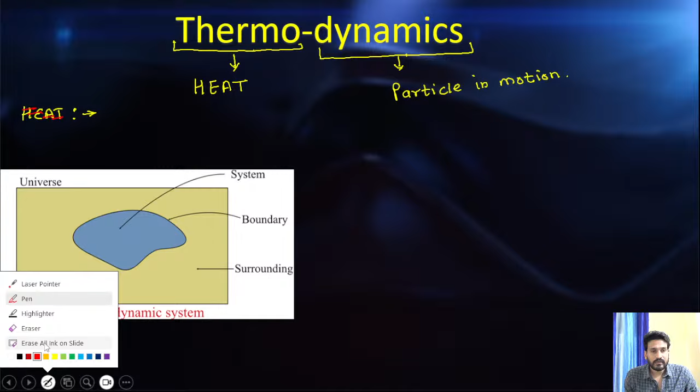So basically I can give a statement, or you can say a definition of thermodynamics: it is the branch of science which deals with heat and its relation to energy, work, and the changes occurring in a system due to motion of particles.

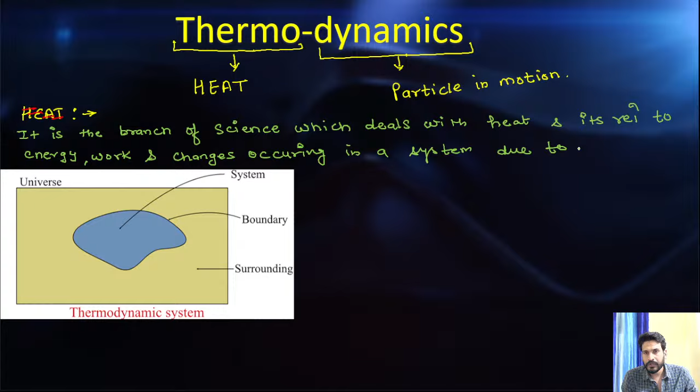Right? So what is the meaning of thermodynamics? It is the branch of science which deals with heat and its relations to energy, work, and changes occurring in the system due to the motion of the particles. Here is a word that is called the system. So first we have to understand what is the meaning of the system. I hope that this is clear to you, right?

So before understanding the system, I can give you another definition of thermodynamics, which is similar to the above. I can say that thermodynamics may also be termed as energy conversion, as in this heat is converted into work or vice versa, right?

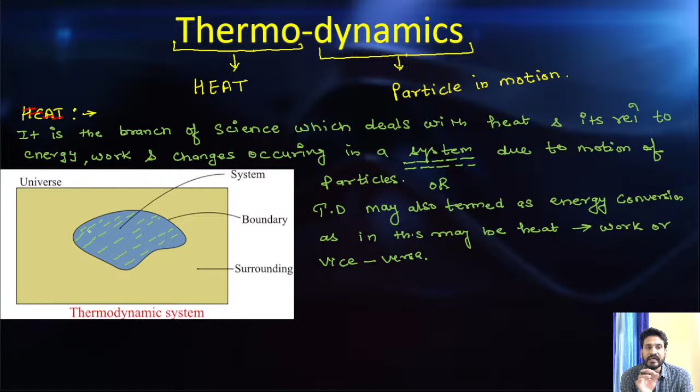Let's suppose in this picture this is the area which is under our observation. What is the meaning of under observation? Under observation means that we are interested to see the energy interactions for this particular area, right? Whatever is happening other than this is not our concern. Our concern is only to study the energy interactions and changes in this particular part due to the motion of the particles. That is called my system, guys.

Other than this, whatever is surrounding, like this area, is called surrounding, right? And an imaginary boundary line is there which separates the system from the surrounding. So this line, this boundary, is nothing but an imaginary line. These are my system boundaries. I hope that this is clear to you.

So this is my system and this is my surrounding, and these are the system boundaries, right? So there is no physical significance of this boundary. This is basically an imaginary separation. I hope that this is clear to you. So only this part is under our observation. Okay, is it clear to you?

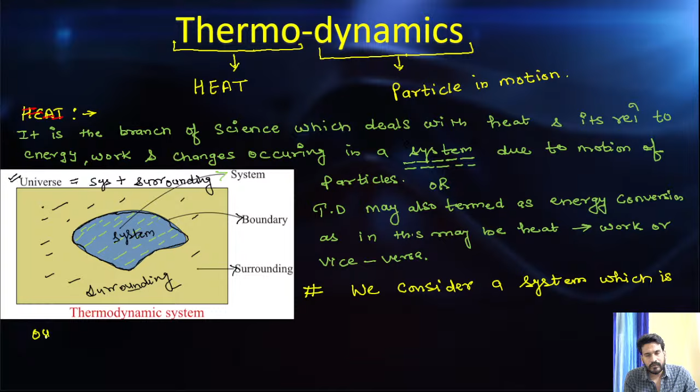So I can make a statement from this concept: we consider a system which is under our observation, right, having boundaries and occupying some space, right? Is it clear to you?

Okay, whatever interaction there is between heat and work, that is basically the interaction between the surrounding and the system. Is it clear to you? Whatever interaction we see between the energies, that is between the system and the surrounding. Is it clear to you?

Right? This is called my thermodynamic system, right? So everything around the system is surrounding. So what is my universe? Universe means system plus surrounding. System plus surrounding is my universe. Okay. Is it clear to you guys? Mohammed, is this clear to you?

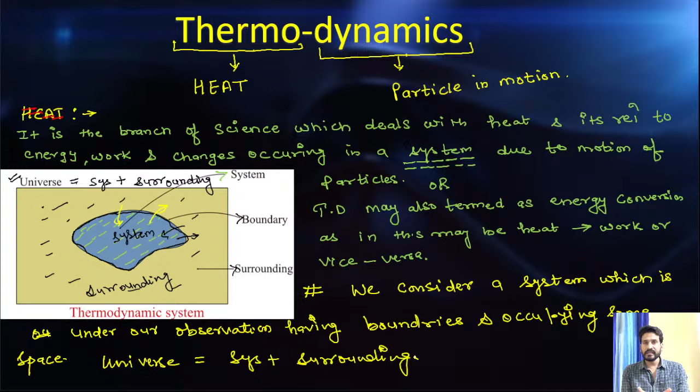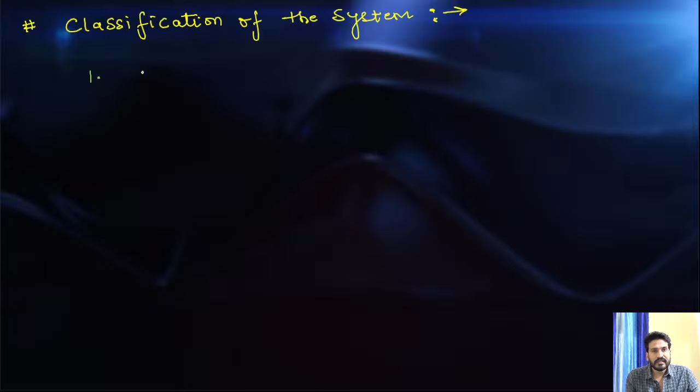Now we have to study the different types of the system. So you can make a heading, classification of the system. What are the different types of the system? So guys, roughly there are three types of the system. One is the closed system.

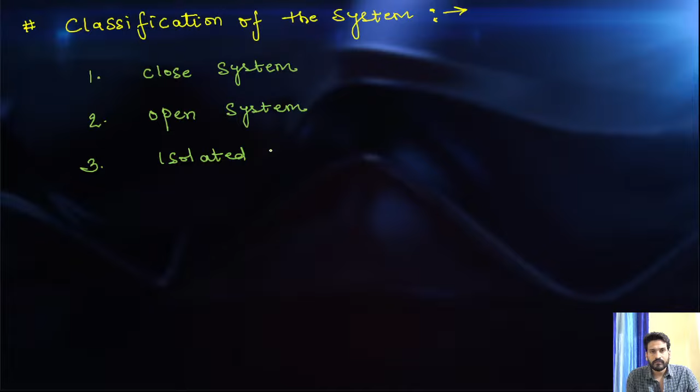Second is my open system. And third is my isolated system. There are three types of the system: closed system, open system, and the isolated system. So what is the meaning of closed system, open system, and isolated system? Let's see this, guys.

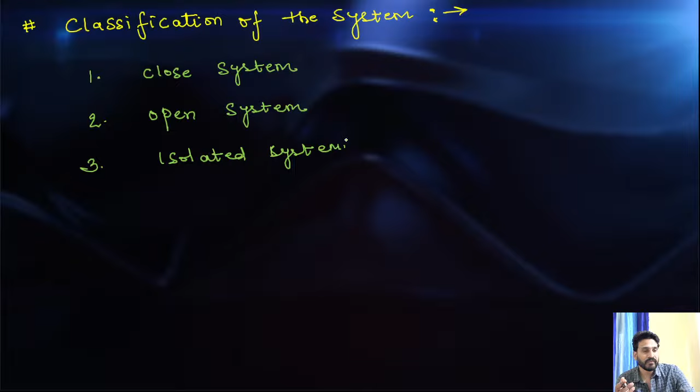If a question statement is like, okay, we have an open system like this, we have a closed system like this, so we should know what the meaning of closed system and open system is. For open system, there are different concepts. For the closed system, there are different concepts. For isolated system, there are different concepts. Okay? Let's discuss, guys.

First of all, closed system. Please put a heading, closed system. To understand the closed system, let's make a diagram so it is easy for us to understand the concept. Closed system is also known as the non-flow system.

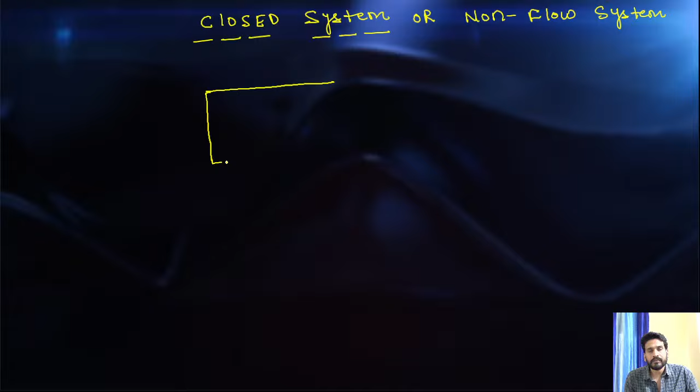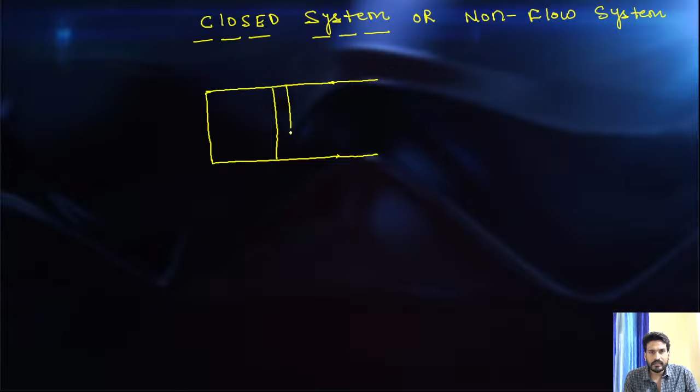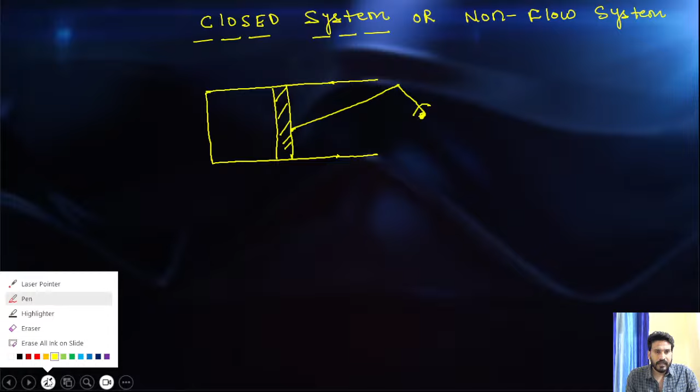Let's suppose, guys, we have a cylinder piston arrangement. It is something like that. Let's suppose that initially the position of the piston is this. This is your piston. This is a crankshaft which is attached to the piston. And these are the gas molecules. Just try to understand it.

Now, first of all, we have to decide what the system is, because we are not here to study the universe, guys. We are here to study a particular system. So for that purpose, we select some specific boundary. And after that, we see the interaction of the system with the surrounding. So I want to see the behavior of the gases when I heat this gas.

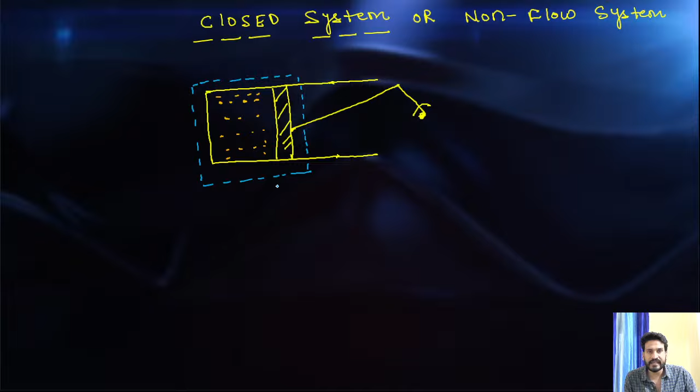So let's suppose this is my area under observation: this piston, this gas, and like that. This is my system boundary, guys. This dashed line is my system boundary. I'm giving heat to this system, right?

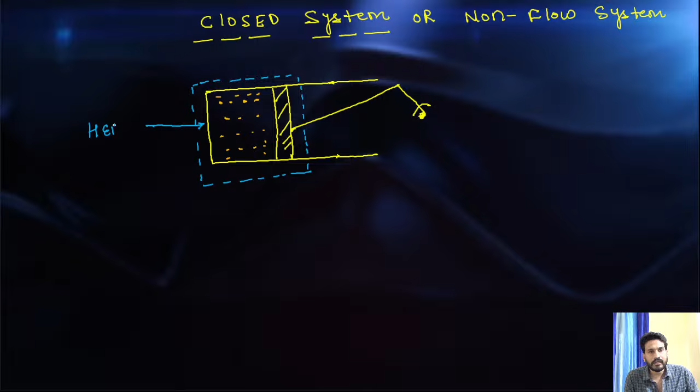So as you can see, if we are heating this cylinder gas system, this gas is going to expand, right? If this gas expands, then your piston moves in this direction. Is it clear to you? When we supply heat to the gas, it is going to expand. The intermolecular distance between the molecules is going to increase, right?

And these molecules apply force on the piston, and the piston is going forward. Let's suppose this is the initial position. The final position of the piston is like this, right? And the gas molecules are here. Now this is my second position.

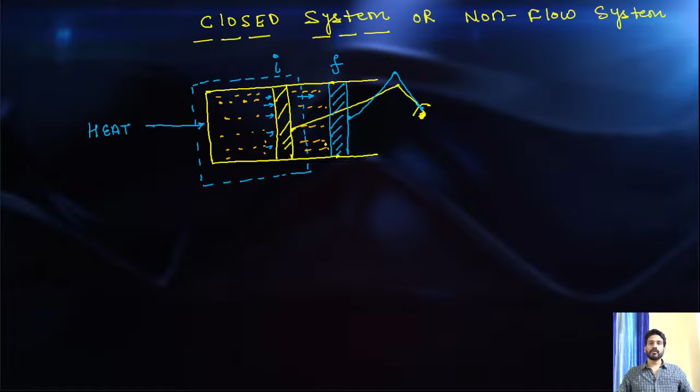This is my final position, right? And this is my gas molecules. I hope that whatever I say here, you understood all my points. Now see, we are studying the closed system. Okay, so here see, this is my heat. I supply the heat to the system. What I'm getting, guys, by heating this gas, I'm getting some work. Is it clear to you or not?

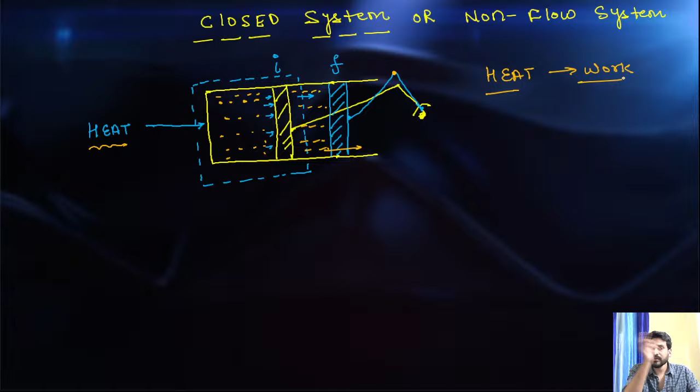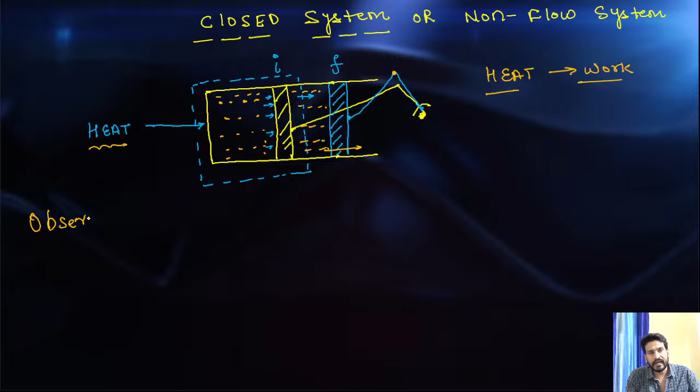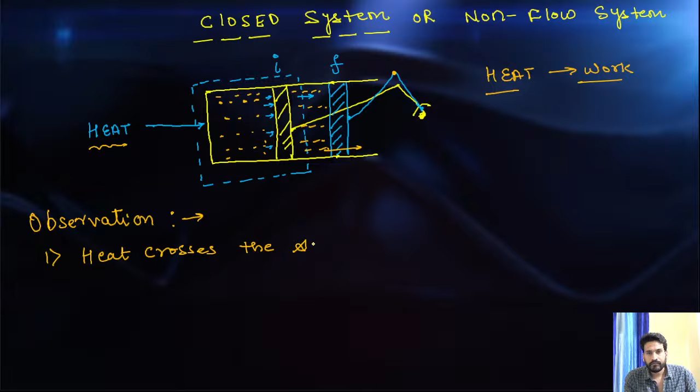Now, I explained the whole process. Now, I'm expecting from you guys that you can help me in the observation. My first observation, tell me if I'm wrong, is that heat basically crosses the boundary. This is my system boundary, and through this system boundary, my heat is crossing, yes or no? So I can make a first statement that heat crosses the system boundary. Yes or no? Muhammad, please let me know if this is clear to you or not. Okay, is it clear to you?

Second statement. See, the piston is moving in this direction, and this is my system boundary. So work also crosses the boundary. Work also crosses the system boundary. These are my two observations. I hope that there is no issue in that. If you have an issue, please let me know.

My third observation is something like, see, this is my system boundary. It means we are going to study this portion only. Whatever the change, we will see the change here only. But as you can see here, guys, this piston is moving here, right? Now we have to study this much portion. Yes or no? So we can say that system boundaries are not fixed. Okay, is it clear to you?

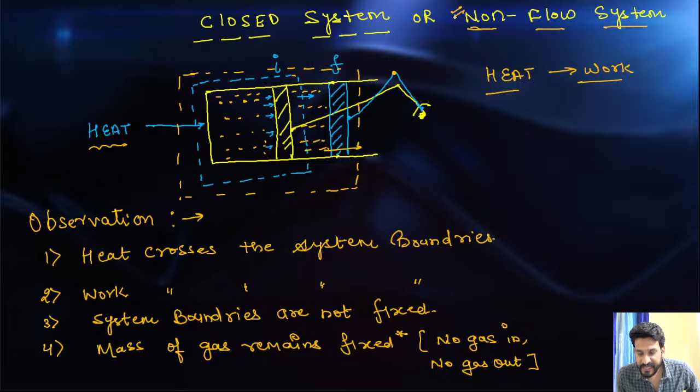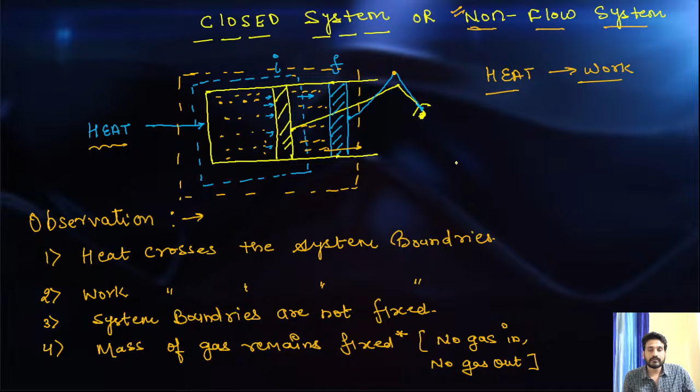Now, if I'm making a single statement, I can say that in the closed system, and this point is important, fifth point, there are two things, mass and energy. I have to see whether mass transfer is there or not, or energy transfer is there or not. There is no mass transfer. Whatever the gas is there in the before condition, after expansion the mass of the gas remains constant. But energy transfer is there. Heat crosses the boundary, work crosses the boundary, heat is converted into work. So this is basically your closed system.

So the important point is that the closed system is called a non-flow system. If you remember the name, by the name itself it is clear that there is no mass transfer at all. That's why it is called non-flow system. So in the closed system there is no mass transfer, but energy transfer is there. Is it clear to you? And these are the other points. You can remember all these points. If you are okay with it, you can tell me. After that we will move forward.

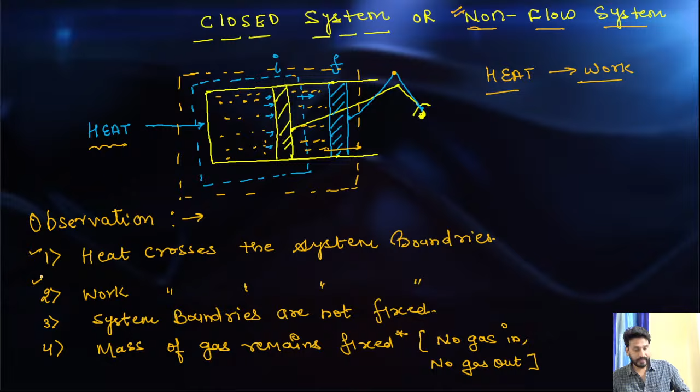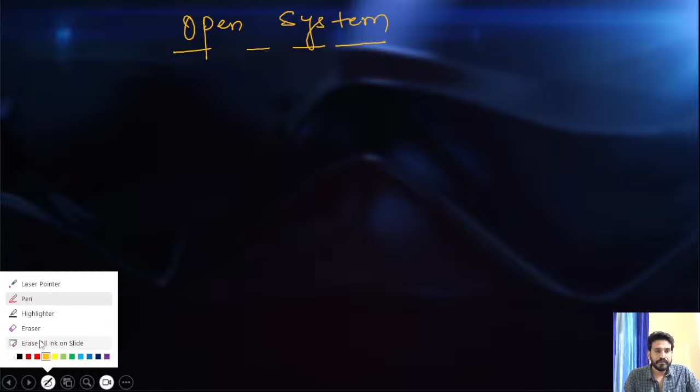Okay, so this is my closed system now. If anybody has any problem, you can ask. Now my second system is open system. What is the open system? We will try to explain this with the help of a compressor. What is the compressor? Compressor is basically a device which is used to compress the gas.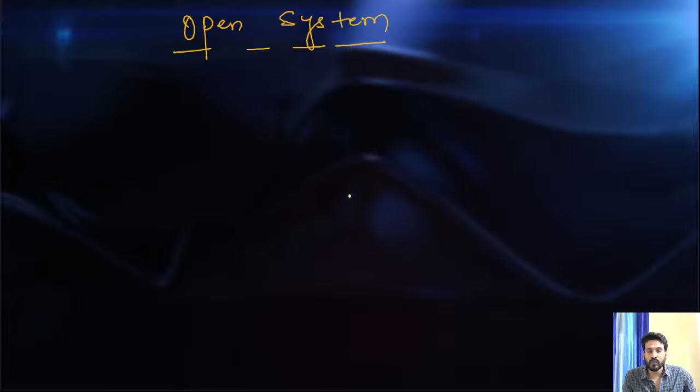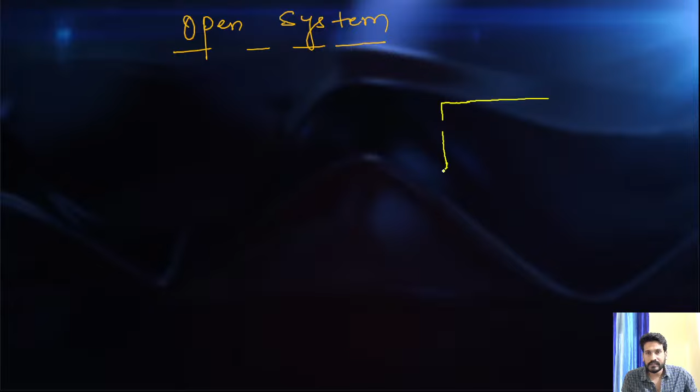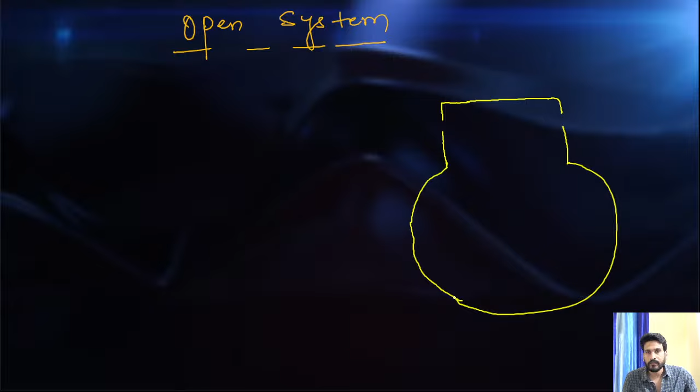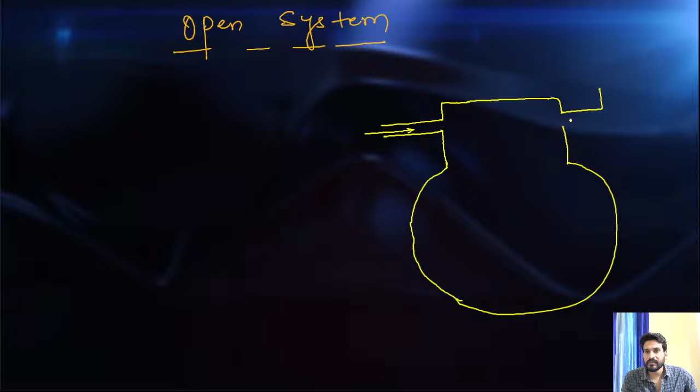So let me make the diagram of the compressor. In the compressor, the main funda is basically to compress the gas, nothing else. So this is the area for the inlet, and this is the compressed gas. Let's suppose this is the receiver, and from this receiver we are receiving the gas. Also this is the piston, which is going to compress the gas. Is it clear to you?

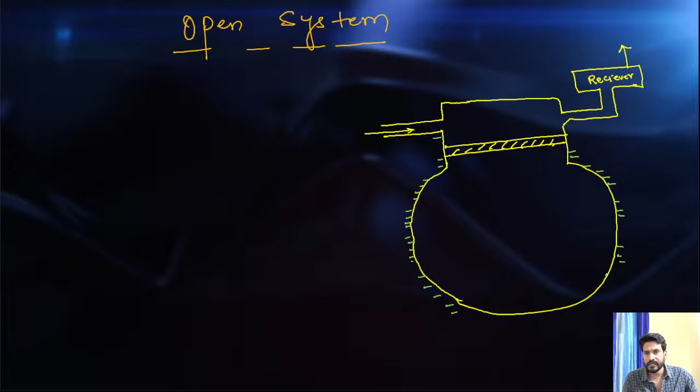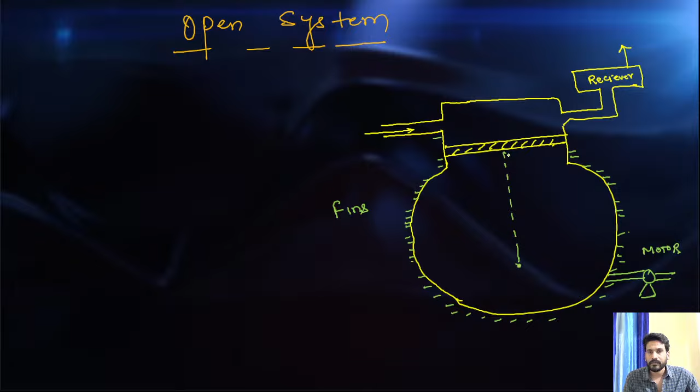There should be fins for the heat transfer. So these are the fins installed for the heat transfer. Now to start this compressor, there should be a motor. So this is the motor, and let's suppose this is your crankshaft. This is your atmospheric air in. And after compressing it, it is the high pressure air which is going here. I hope that this is clear to you.

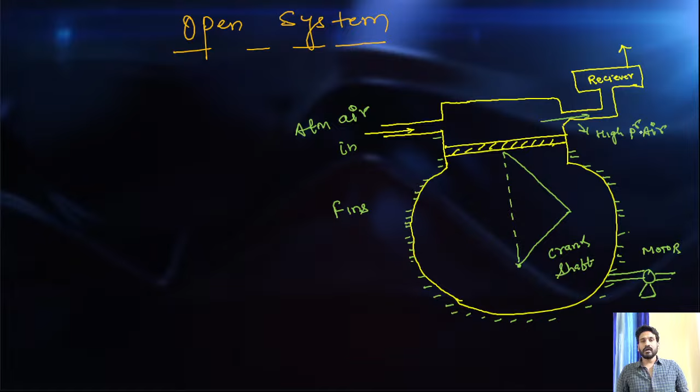Now let's understand this. This whole is your compressor. The basic funda of the compressor is atmospheric air goes into this compressor, it is compressed through this piston, and when it is released, it goes in this direction and we are getting the compressed air here. In the compression process, heat is released.

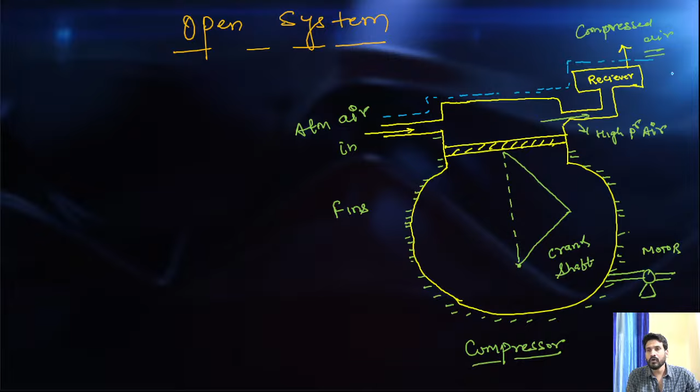So first of all, let's make the system boundaries. The boundaries are the space which is under our observation. So this whole compressor is under our observation. These dashed lines are my system boundaries. Now in a similar way, I will try to see what crosses the boundaries. Is it clear to you?

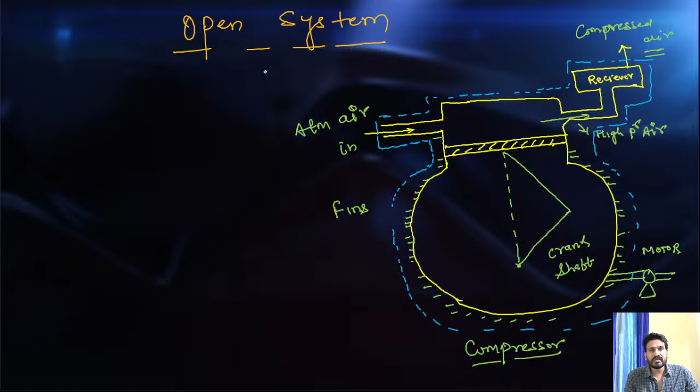Open system. Like closed system is called non-flow, open system is called flow system. Why is it called flow system? I'll tell you, don't worry. Now first, this motor is going to move this crankshaft so that the piston moves in this direction and compresses the air. So this motor supplies the work, yes or no, guys?

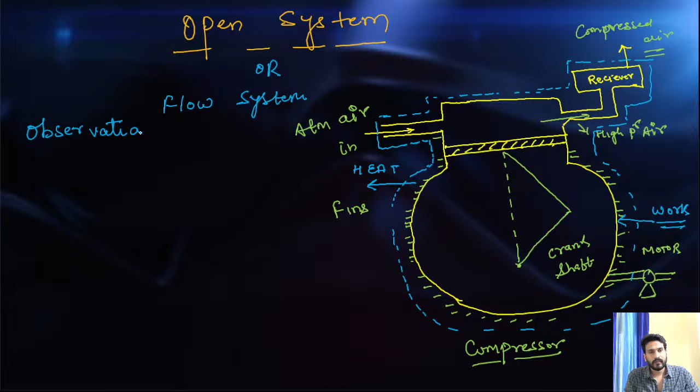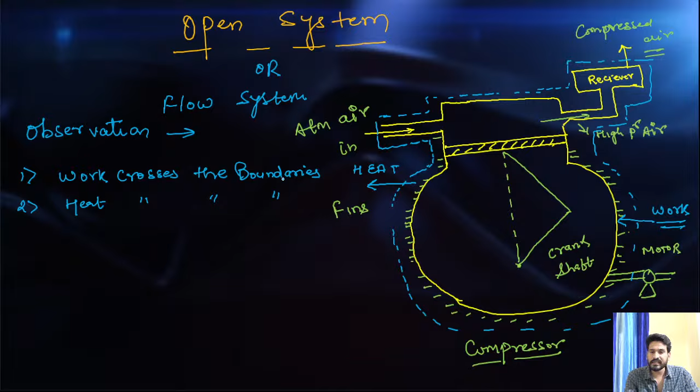Now in this compression process, there is heat generation due to friction and all that. So for the heat transfer purpose, we installed the fins here. Through these fins, heat is transferred. So there are two statements I can directly observe: work crosses the boundary, and heat also crosses the boundary. Yeah, Mohammed, you have any doubt? These two points are similar to the closed system. I hope that this is clear to you.

Now, the third point I can make is that here the system boundaries are fixed, guys. Here it is not moving. In the previous case, my system boundaries were not fixed. But here my system boundaries are fixed.

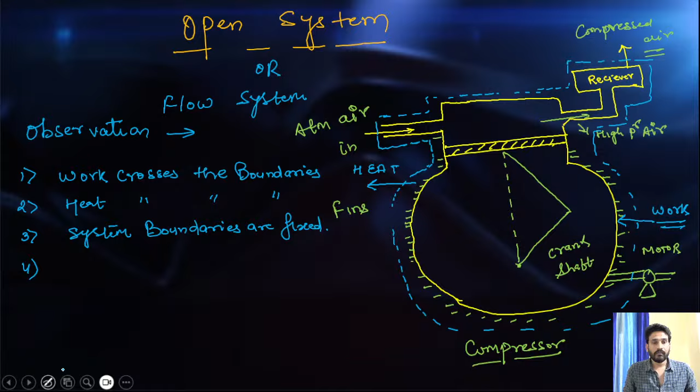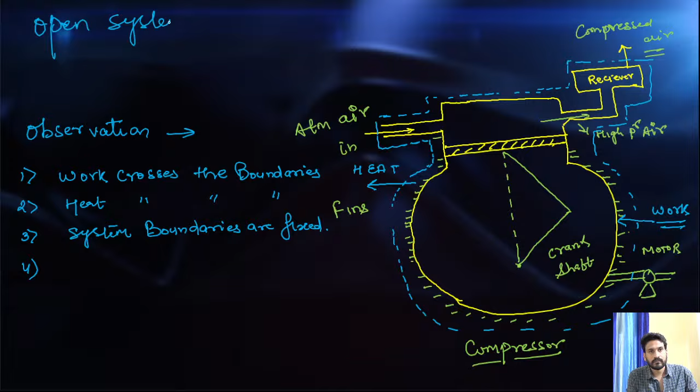I hope that this is clear to you. Okay. Now, fourth point. What is my fourth point? Please tell me, is there energy transfer or not? Is there any energy transfer in this process or not? Please let me know.

Yes, Mohammed. Can you make the statement about the energy transfer? Energy transfer is there or not? Or you can say, heat transfer is there or not? Obviously heat transfer is there, right? What about the mass transfer?

So see, in this system mass transfer is also there. The mass of the gas is not fixed here. Is it clear to you? Here mass of the system crosses the system boundary. At the inlet, and also the compressed gas we are getting here is leaving the system boundary. So at the inlet and the outlet, mass transfer is there. So mass transfer is also there, right?

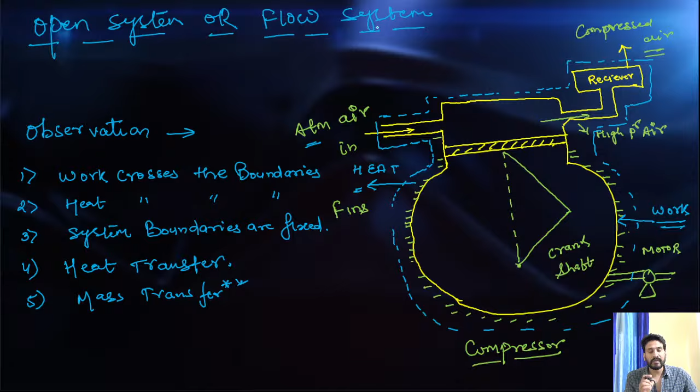Because the mass transfer is there, this system is called flow system, right? So in the closed system, there is only heat transfer, no mass transfer. In the open system or flow system, heat transfer as well as mass transfer is there. That's why it is called the flow system. Okay, is it clear to you? Okay, done. I hope that everybody is making the notes parallelly. So in the closed system, right?

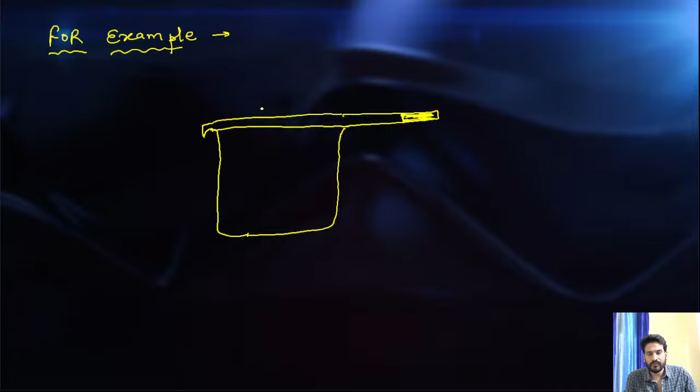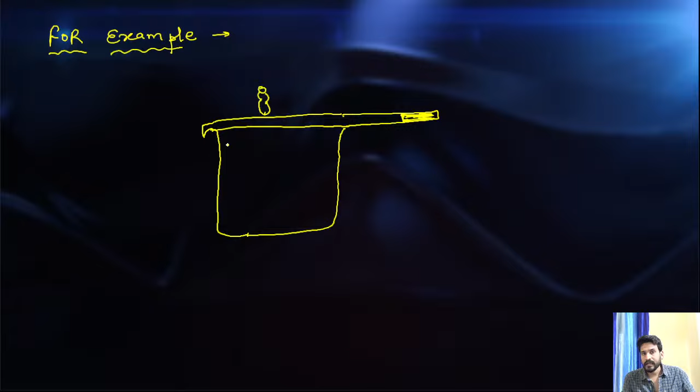Okay. So let's take an example and tell me whether the system is an open system, closed system, or what. Let's take a pressure cooker. This is my pressure cooker and this is the vessel of the cooker. Is it clear to you? And there is some content in it. Okay, just analyze this system.

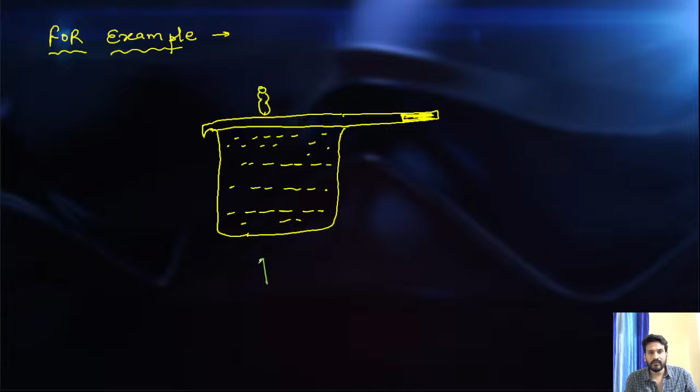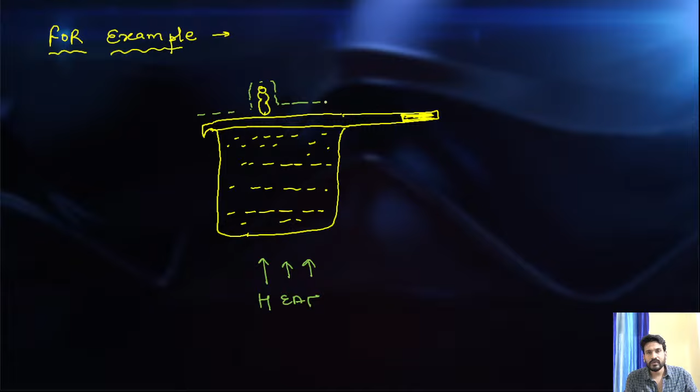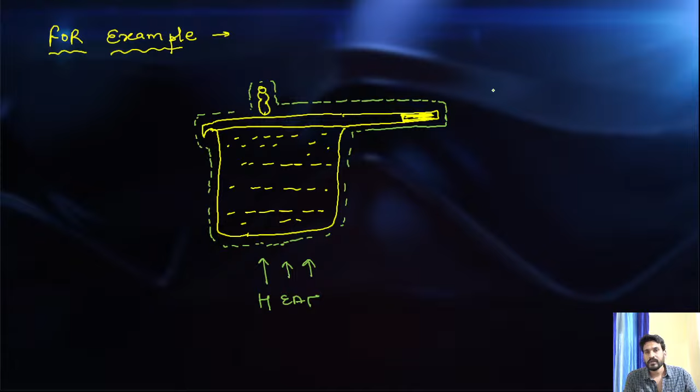So obviously we are giving the heat to my pressure cooker, and my pressure cooker is basically my system. So if this is my system, then there is a system boundary. Let's suppose this is my system boundary, right? And we are giving heat to the pressure cooker, so first of all, heat crosses the system boundaries, right? So my first observation is that heat is crossing the system boundaries, right?

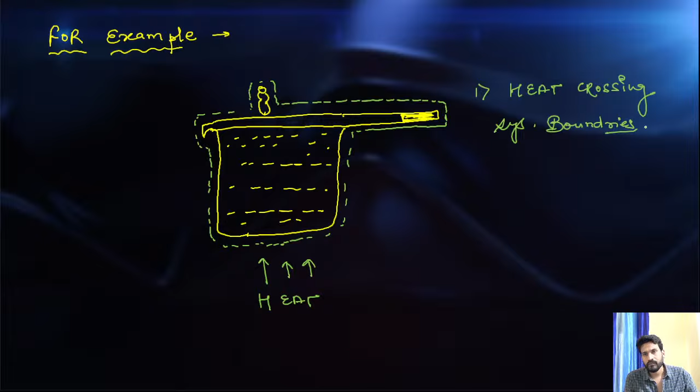Now see, it's nothing like you just put your cooker onto the gas and suddenly it starts to whistle. Yes or no? That doesn't happen, right? It's nothing like you put your pressure cooker onto the gas and the whistle immediately starts blowing. It is taking some time. It takes some time for the generation of the steam, and due to the pressure of that steam, my whistle is going to blow, right?

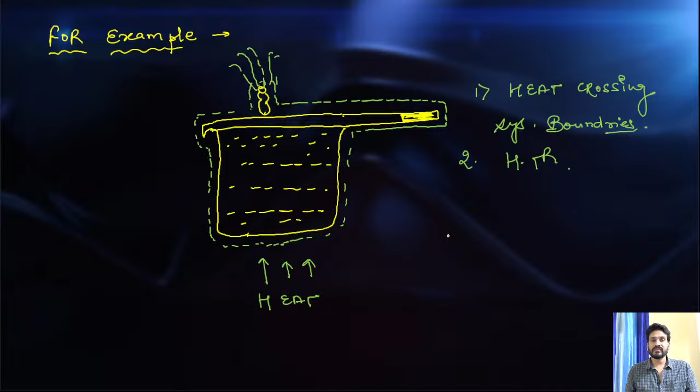So when there is no whistling in the pressure cooker, up to that point my pressure cooker is a closed system, because there is no mass transfer. Only heat transfer is there. But once, due to the steam pressure, my whistle is whistling, then steam crosses the boundaries, or you can say mass transfer is there. After that, it is my open system.

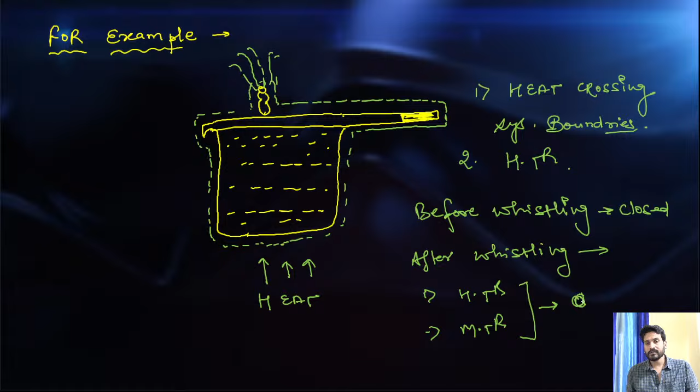So before whistling, it is my closed system. After whistling, heat transfer is there and mass transfer is also there. That's why I can make a statement that this system is my open system. Is it clear to you? So we can make the statement like this. Yes, Mohammed, am I clear with this? Yes or no?

Please see the initial 2, or you can say up to the 3 lectures, very patiently, because in the initial lectures we are building the concept, the foundation which is important for the further subject, right? Is it clear to you? These are very small things, okay? And these small things are basically your fundamentals. If your fundamentals are strong, you can solve any difficult question. If your fundamentals are not strong, if you are taking this information for granted, then it's not going to work, guys.

Okay, so the initial 3 lectures are very important for any subject, because in them we are trying to give you the overall overview of the subject: what the subject is, its importance, and how we deal with it. Also, to understand the subject there is a specific language in which we discuss the small terminologies. We build those terminologies, and after that my foundation is built. Now I can stand my tall building. There is no issue, right?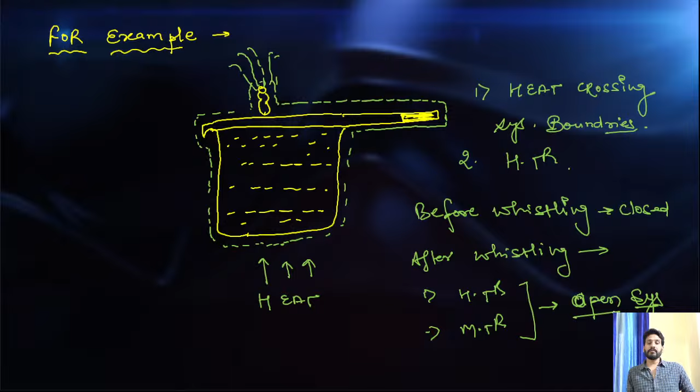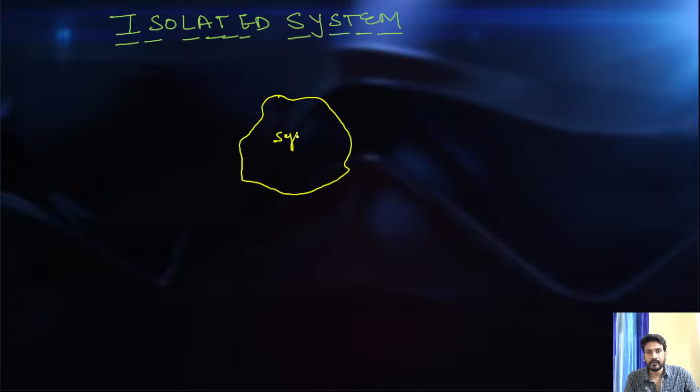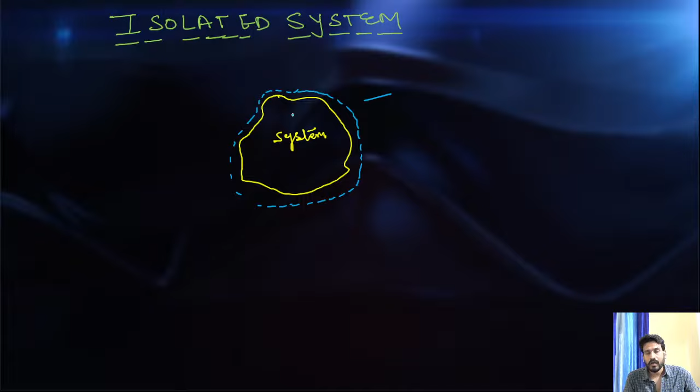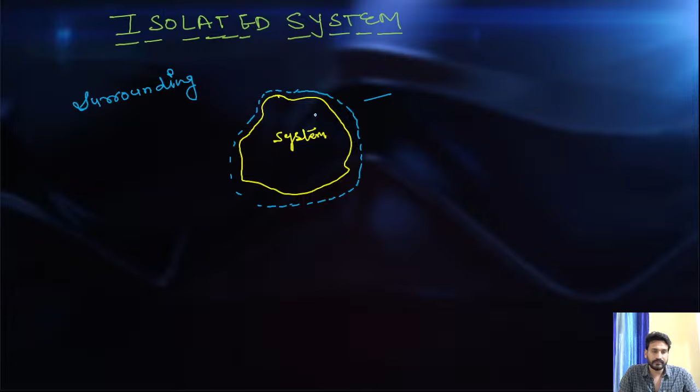Okay, now my third system is the isolated system. As its name suggests, isolated means there is no interaction of the system, right? So let's suppose this is my system, and this is the system boundary. What is this? This is the surrounding. If there is no interaction between the surrounding and the system, means there is no heat transfer, no work interaction, the system is not going to give work to the surrounding, then we can say the system is completely uninfluenced by the surrounding, guys.

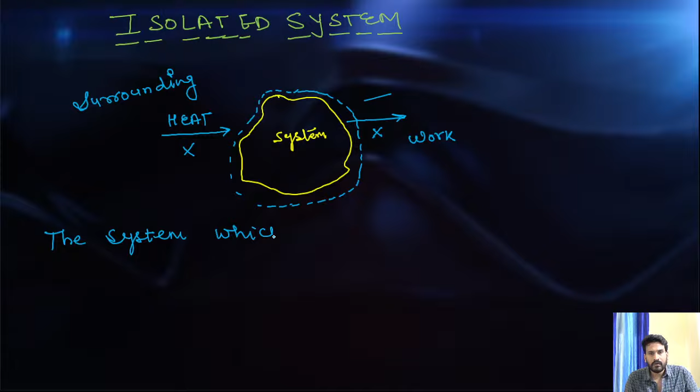Okay, I can make the statement that the system which is completely uninfluenced by the surrounding is known as an isolated system, right? There is basically no interaction at all between the system and surrounding. Is it clear to you?

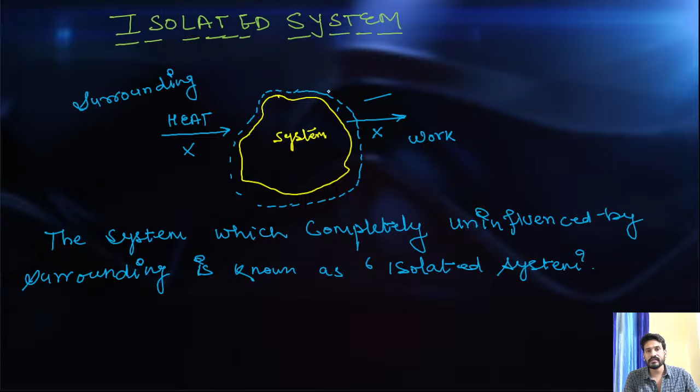So we can say that in the isolated system, the system boundaries are so rigid that they do not allow heat and work to pass through them. Is it clear to you? So tell me one thing, what kind of transfer is there? Is heat transfer there, work transfer, mass transfer, or is there no transfer here, guys? Please let me know. Heat transfer is there or not? Mass transfer is there or not? Please let me know, so that I can make a statement.

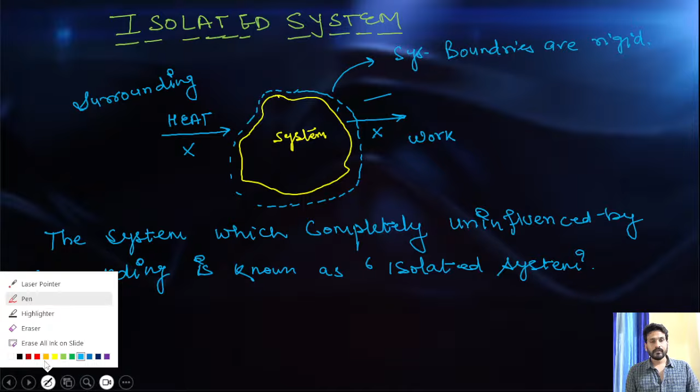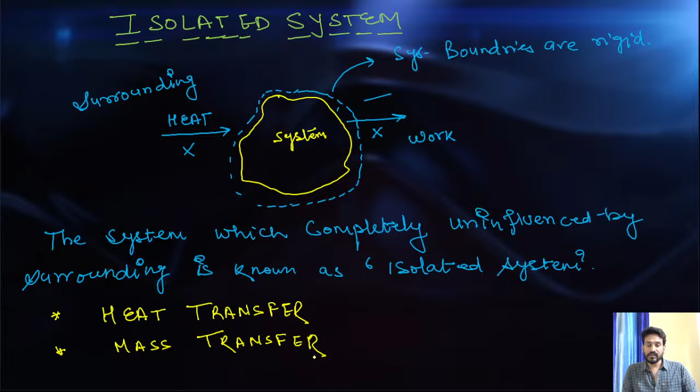Heat transfer is there or not? Mass transfer is there or not? Or only heat transfer is there? Yes, there is no transfer here. There is no heat transfer at all. There is no mass transfer at all. Right? So in the isolated system, there is no heat transfer and no mass transfer.

Okay, so let's revise, guys. Closed system: only heat transfer. Open system: both heat transfer and mass transfer. Isolated system: no heat transfer, no mass transfer. Okay, so this is basically the classification of the system: closed system, open system, and isolated system, and the transfers and cases we discussed here, guys.

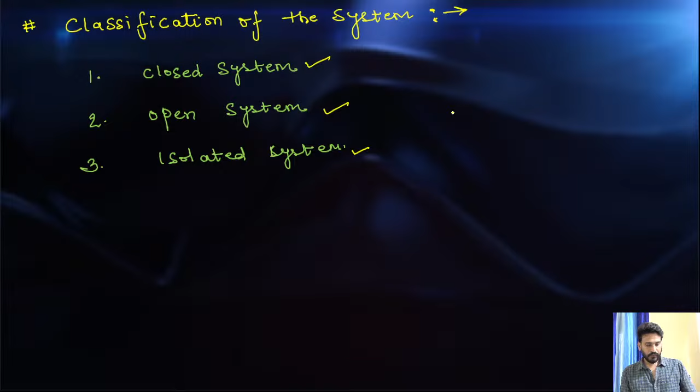Okay, so for today, that's it from my side, guys. In the next class we will discuss the further properties of the system, right? Intensive, extensive, and all that. After that we will explain temperature, temperature scale and all that.